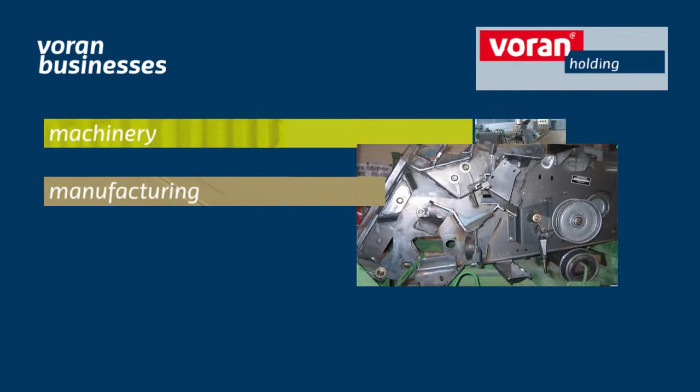For more than 8 decades, Voran has stood for quality, innovation, and a dynamic outlook. Always at the cutting edge, we continue to develop proven systems as well as pioneer new ways for sustainable, cost-effective, all-in-one solutions to leading industrial standards worldwide. Voran, the name you can rely on. We are the market leader in our business sectors: machinery, manufacturing, plant construction, and facades.

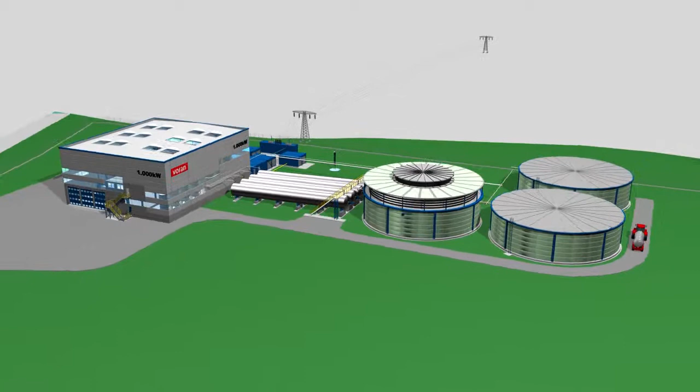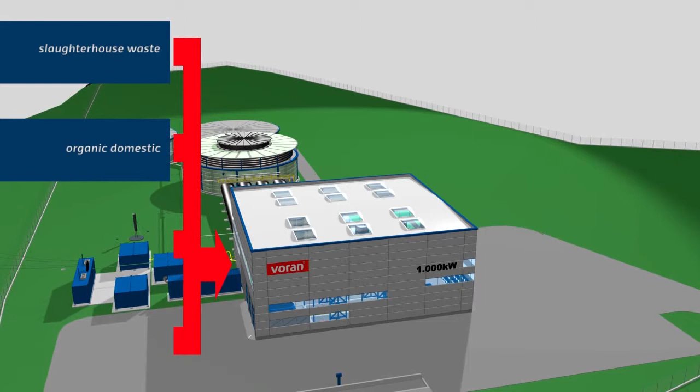The following animation demonstrates how this environmentally neutral process works. The raw materials, also called substrate, used in biogas plants are usually Category 3 slaughterhouse waste from pigs, beef cattle, sheep. Organic domestic municipal waste from disposal companies, trade, industry, supermarkets, unpackaged or still in packaging.

Waste from agricultural plant production, liquid manure, solid manure. Process waste and organic residues from the agricultural and food industries. The electricity and heat generated are baseload capable, which means that they are available around the clock independently of weather conditions.

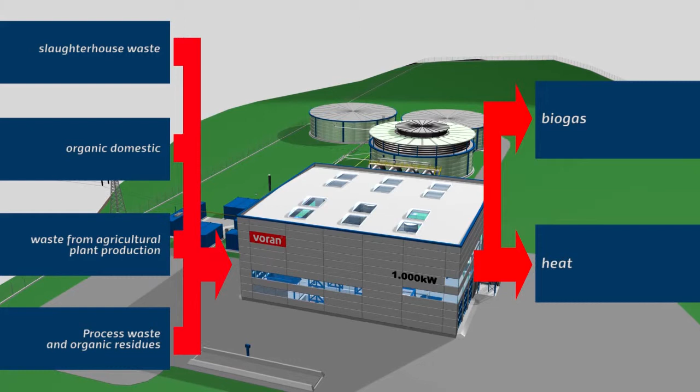Organic residues are not only disposed of in line with regulations, but are also processed profitably as part of a sustainable cycle in the form of biogas, which is then purified and compressed for further use. Heat, dissipated from the cooling water, and exhaust gases from the gas-fired power station. To the same extent that you use organic waste in this CO2 neutral process, you avoid the consumption of fossil fuels.

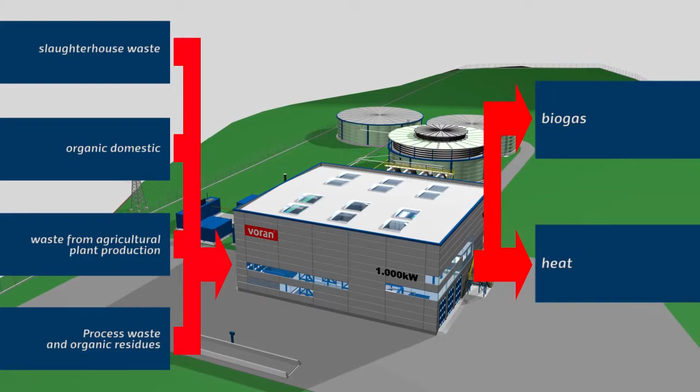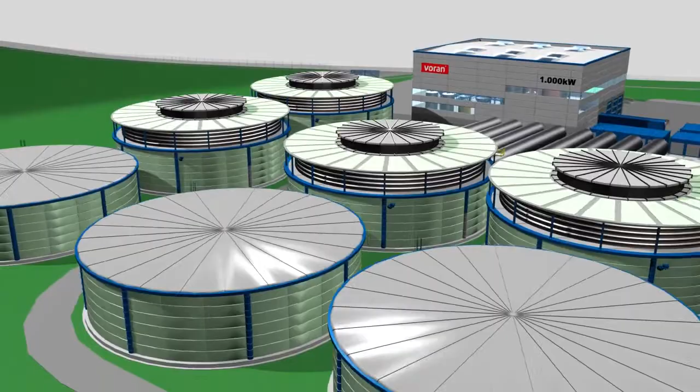Voran biogas plants can be implemented quickly thanks to their flexible configuration and, depending on demand, can be expanded at a later date. Specific customer requirements, the latest scientific knowledge put together with ongoing practical experience with references in process technology, instrumentation technology, and the management of power plants are the basis for our modular supply capability of 10,000 to 150,000 tonnes of organic matter per year.

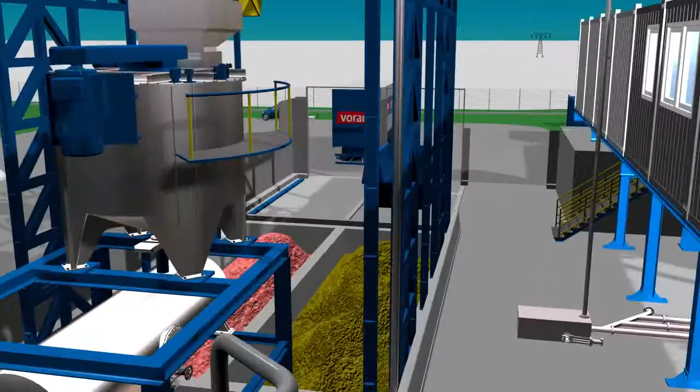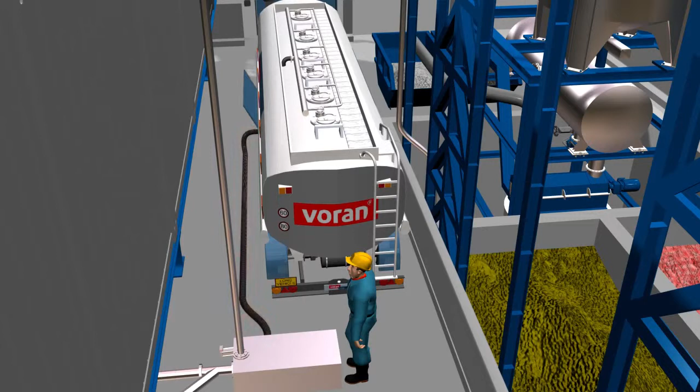Customers supply material via a weighbridge, where the weight of the vehicle plus load is recorded. Bulk organic waste is tipped directly into the intake hopper within the odour lock inside the delivery building. Containers are delivered to the unloading station from where the organic waste is fed into the intake hopper. Tankers with liquid organic suspensions dock at standardised connections to pump the liquid directly into the relevant holding vessels.

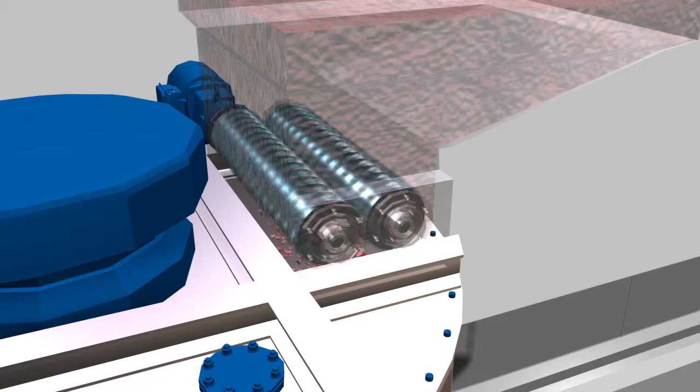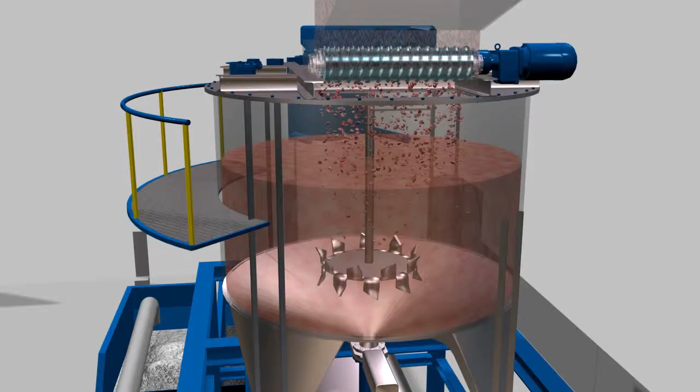The principle for optimizing fermentation is liquidization, mixing and removal of contaminants. A crane lifts the substrate into the preparation tower, where it then passes through these processes. The shredder pulverizes organic waste into particles smaller than 25 mm in order to obtain a structured substrate. In the pulper, the substrate is reduced into a suspension and mixed homogeneously. Contaminants are removed in the separator, collected in containers, and then properly processed or disposed of by service providers.

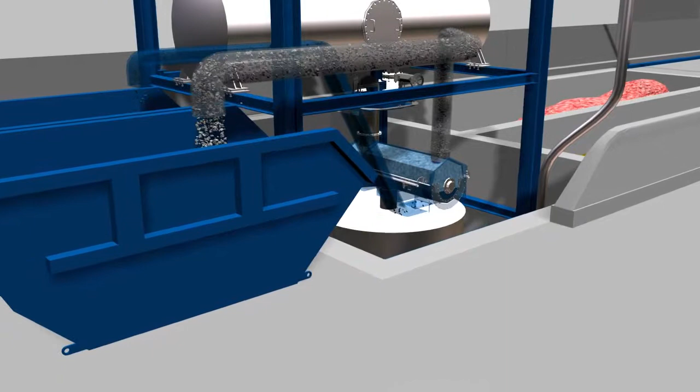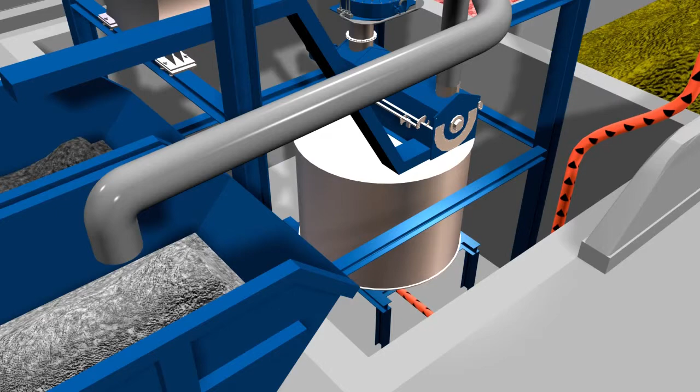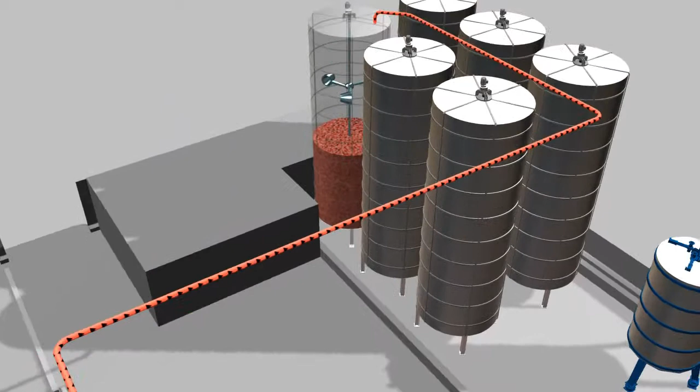The substrate, now liquefied, mixed and free of contaminants, is collected in the pump-off tank and fed into the appropriate holding vessel. A technical innovation of Voran plant technology is that the substrate produced in the preparation tower is graded according to specific criteria and then stored in separate holding vessels. Liquid suspension, ready for use, brought in by road tankers, is fed directly to the appropriate holding vessel.

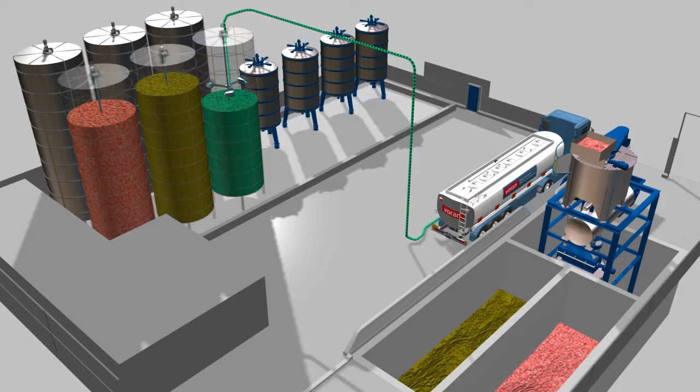The admixing sequence during feeding is a precision process monitored by load cells on which the admixing vessels are standing. This ensures consistent substrate mixing quality and high biogas yield. Sealed airtight and continuously heated and stirred, the desired biogas product is made available within a few hours, days.

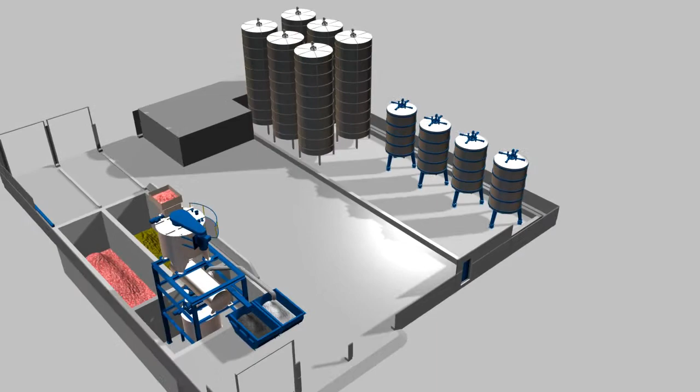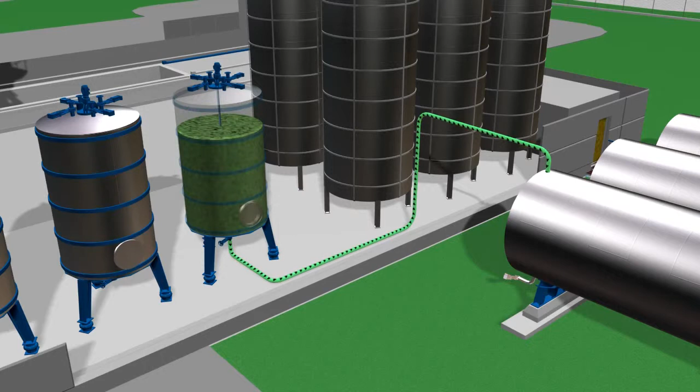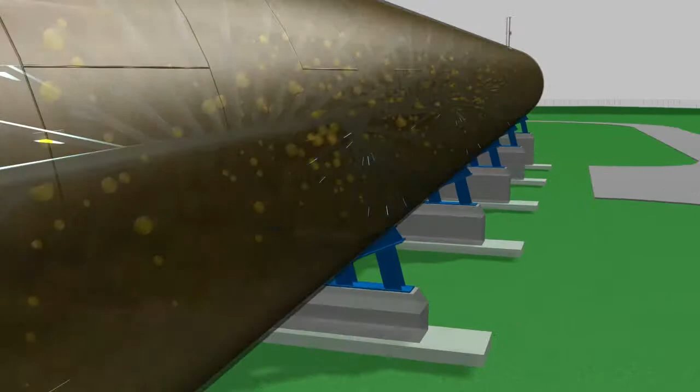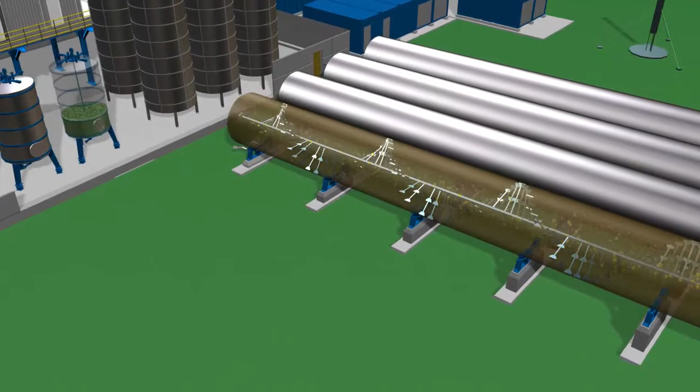The actual fermentation process takes place in the main fermenters and post-fermenters. Various types of bacteria, microorganisms and enzymes break down the substrate until the methane fermentation process releases the required biogas product. Each admixing vessel containing a successfully optimized substrate charge is assigned a tube fermenter, meaning that several biogas plants can be operated in parallel.

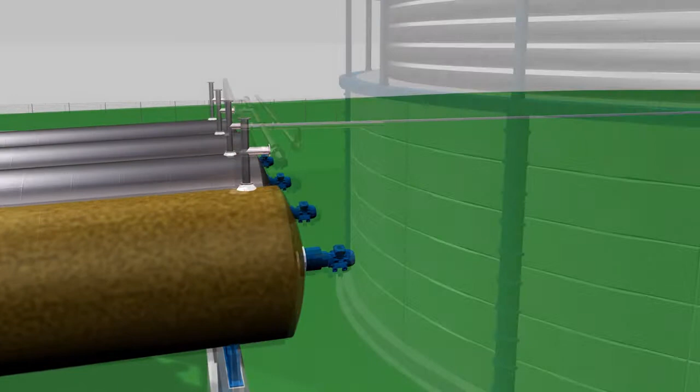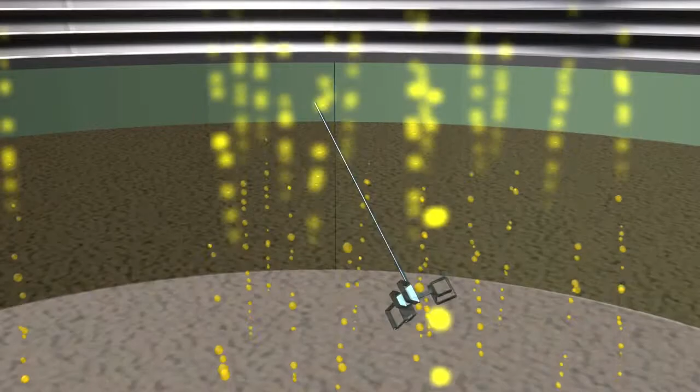The relatively fast rate of flow through the main fermenter ensures short reaction times, more rapid control response, and a favourable level of redundancy. The gas volume and quality inside the fermenters is monitored continuously. From the main fermenter, the substrate is fed along a holding path into the post-fermenter, where the biogas is stored in the flexo tank and can be drawn off pressure-free.

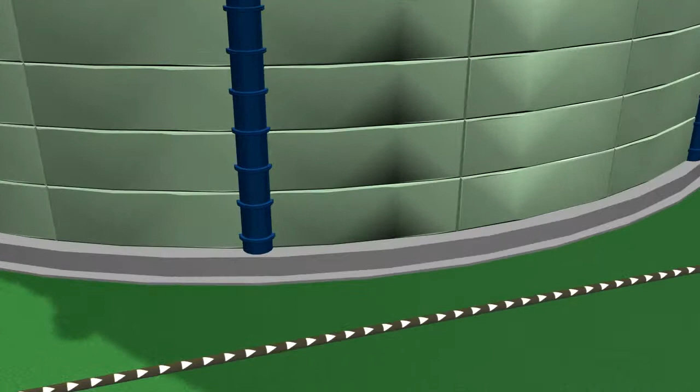After fermentation, the spent and sanitized substrate is then fed into substrate storage, where it is kept until it can be processed in the fertilizer module or used as manure. The storage capacity can be selected to comply with legal regulations. Before the spent substrate can be fed to final storage, it must be sanitized at a temperature of at least 70 degrees C for at least 1 hour, as dictated by legislation.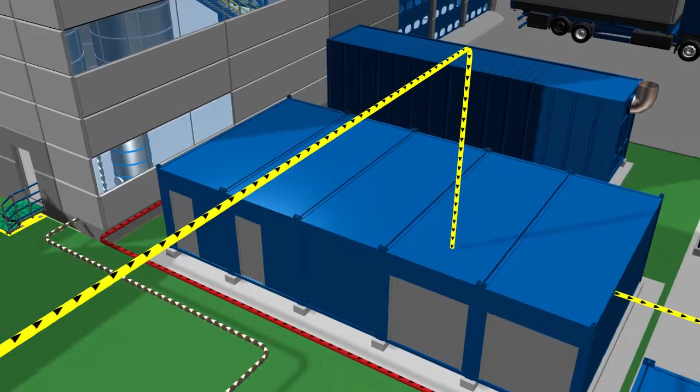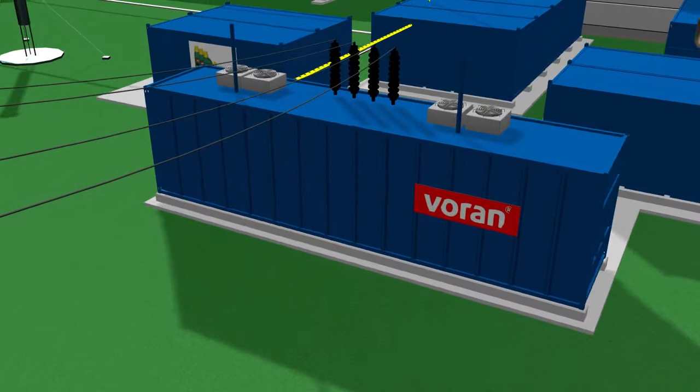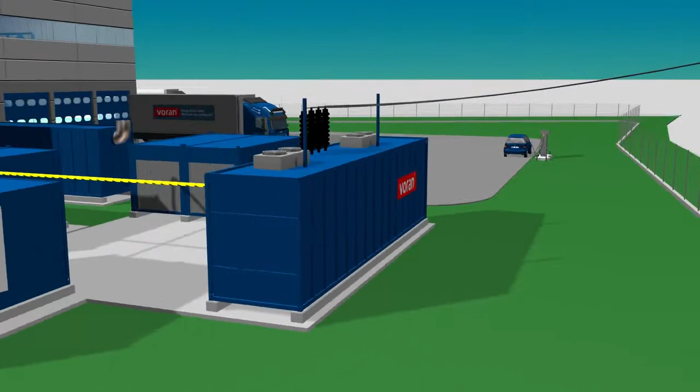Because water vapour and hydrogen sulfide are problematic for gas applications downstream, the biogas must be prepared according to the downstream process. For combustion in gasifier power stations, the biogas is scrub-dried, cooled and compressed. The electricity generated is fed into the mains network as eco-power or sold directly to local consumers. Thermal energy is also generated at the same time.

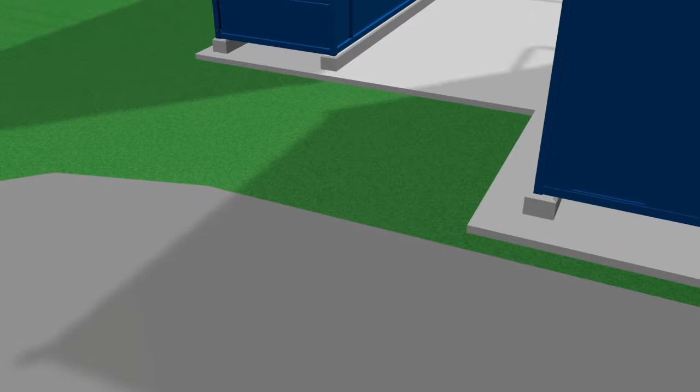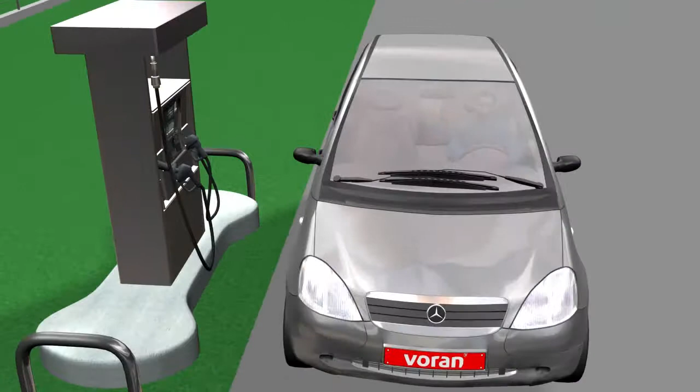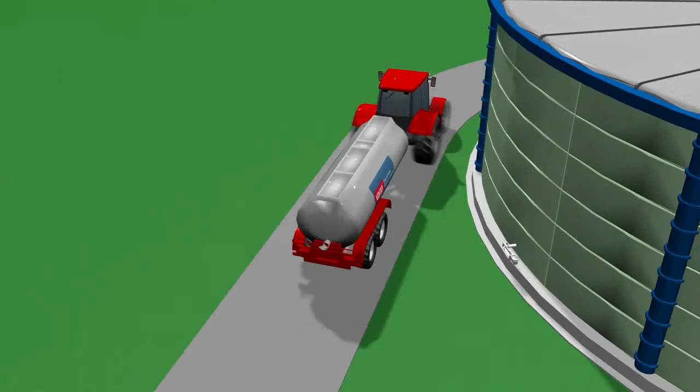And biogas can be fed into the gas supply mains so that it can be sold or piped to another location to be consumed or sold. Biogas can be used to fill gas cylinders or used as fuel for vehicles. In addition to electricity and heat, Voran biogas plants also produce high-quality, odour-neutral fertiliser. The nutrients in the substrate remain intact and are ideal for use on plants. The fertiliser can be used on authorised agricultural areas within the scope specified by legislation.

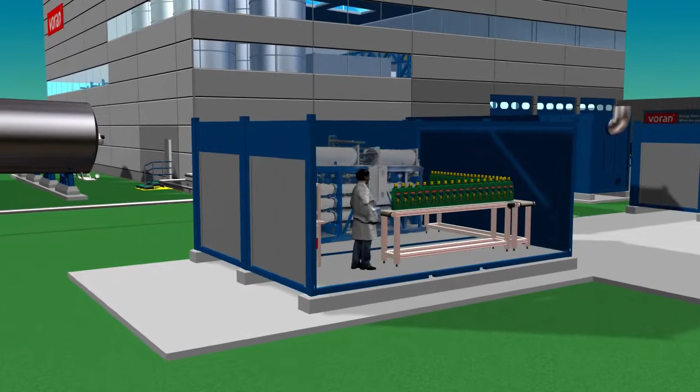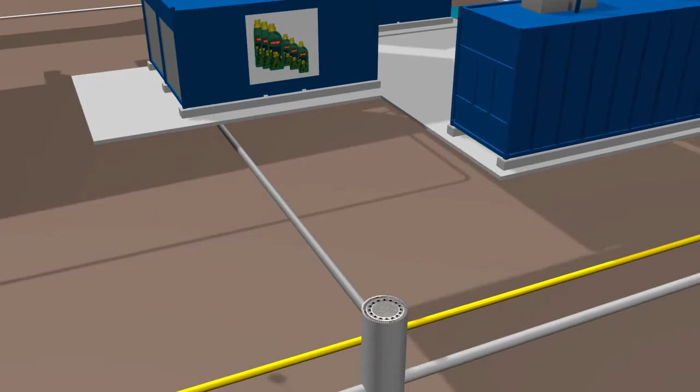As an option, Voran offers a fertiliser module for thickening the spent fermented substrate so that it can be used together with a filling unit to fill consumer packaging units in 1, 2 and 5 litres. This approved organic fertiliser complies with the strict directives of the laws applying to fertilisers. Process water is largely recycled within the plant. Any drain water can be fed into the municipal sewer or into water channels with sufficient freshwater flow.

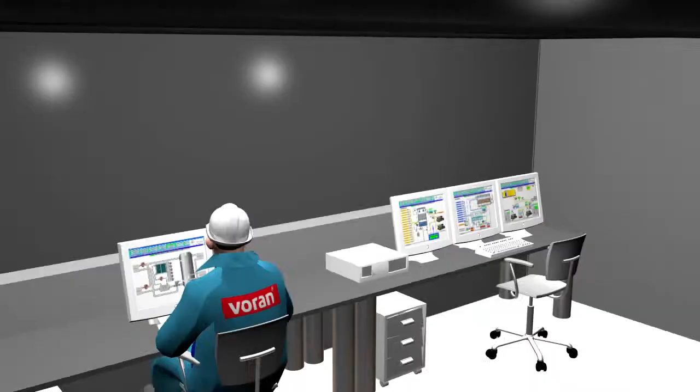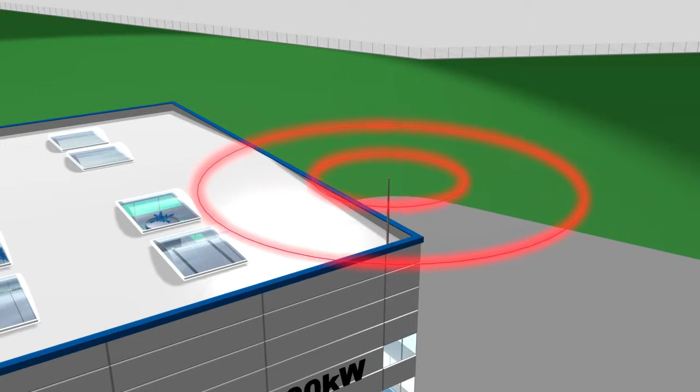The very latest measurement and instrumentation technology is implemented to optimise processing, yield and availability. Using a computer modem, it is possible for authorised specialists from the plant operator and manufacturer to monitor and control the plant from a remote location.